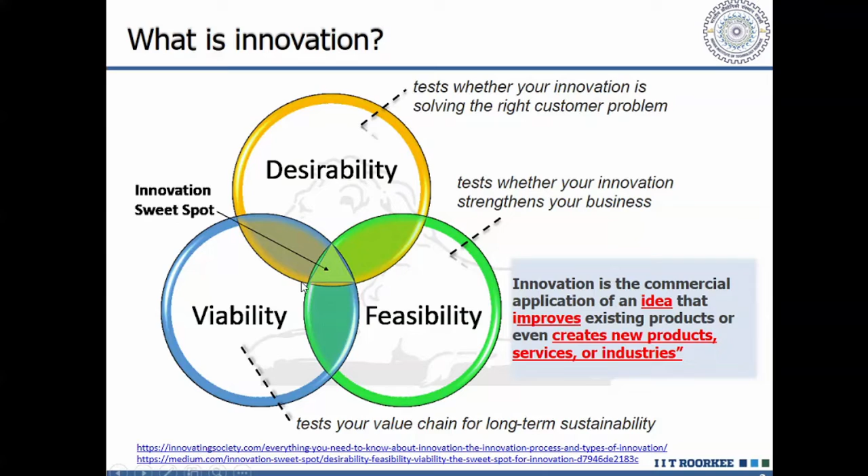Right from the materials, using certain transformation techniques or processes, it has been converted into the final product. So that process of converting raw materials to the final product—if we are improving it, if we are trying to come up with new developments in those processes—that will fall under the broad gambit of process innovation. It will lead to a better price for the customer.

The assembly line reduced the production time of a car, and we have seen the benefits can be multifold. It can be reduction of price for the customer, reduction in time, reduction in labor, and reduction in materials used. In this example, the assembly line reduced the production time of a car from 12 hours to only 2.5 hours.

Similarly, the second process innovation example is Google's 20% project. This project allows Google employees to work on personal projects for 20% of their working time, and this process innovation led to the development of Gmail that all of us use these days.

So we have seen the basic idea about product innovation and process innovation. During this complete faculty development program, there will be different speakers. Someone may focus their talk on product innovation, some others may focus on process innovation. So I am trying to set up a tone so that you understand the terms being used during the next lectures.

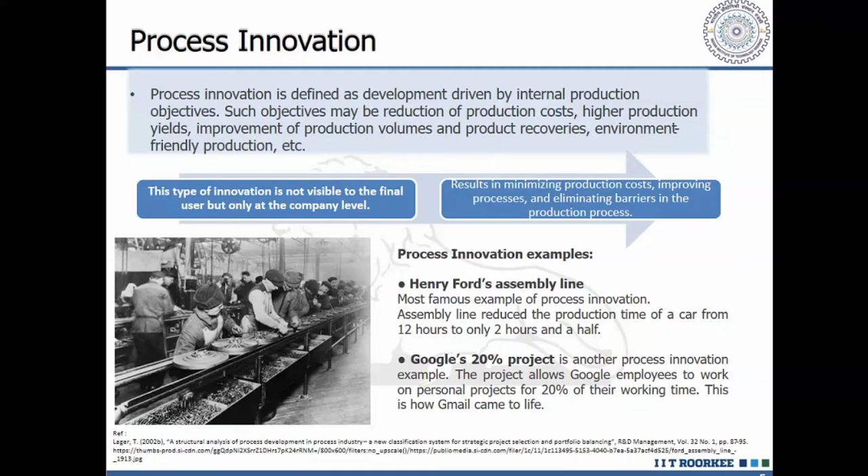So we have the potential, we have that talent pool, we have the age dividend and demographic dividend, as Professor Vanita was addressing in the morning. We have a lot of young generation, and creativity is highest when you are young. So our young generation has the potential to become innovators, to become entrepreneurs.

So we are slowly and steadily improving our rankings in the Global Innovation Index, and we have entered the top 50. India ranks 48 in the Global Innovation Index, which certainly is not where we belong. We can certainly jump further and come into the top 10 innovative countries in the world.

This depends upon our talent pool of young creative minds that we have in the country. The only thing we need to focus on is design thinking about the products, the needs, the whys and the hows of each and every product that we use.

Now, how that can be achieved from a system point of view, we are organizing this faculty development program, and we got around 130 applications from various faculty members across the country. These participants are part of our FDP family now for the next one week, and we will continue our discussions in this direction.

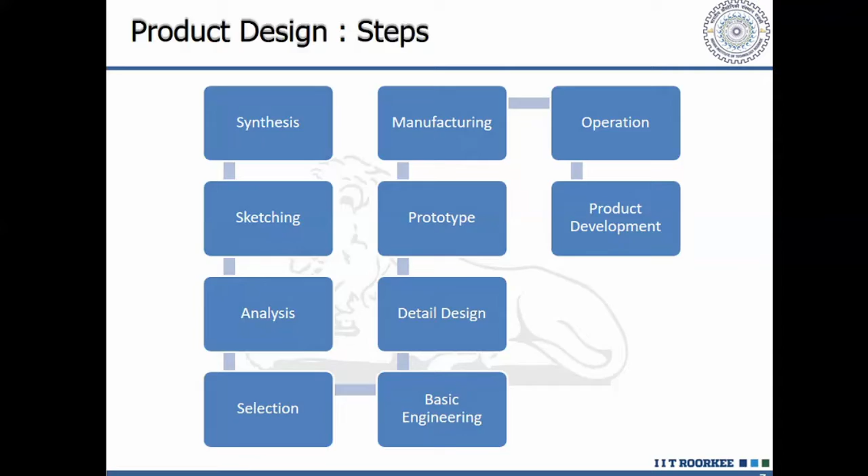But that is not so important, because those steps may vary from company to company. Research and development is an integral part of every positive thinking organization, so the research activity is continuous. Once you get tangible output from research, that output is converted into a product. But the analysis part is very important when developing a product or going for product innovation.

Now let us see the marketing aspects of the product. We study the expected demand, both short-term and long-term. Secondly, we focus on the functions offered by the product, whether they are desirable and acceptable to customers. So we focus on the requirement. But these are not the only steps we go to market with.

We try to understand the demographics - who are going to be our customers, what are their tastes, what are their specific requirements. As we saw in the example Professor Vanita gave in the morning, the product was launched but was not that successful. What are the reasons? She pointed out the important reason of marketing.

That is the most important thing - to assess the pulse of the customer, what the customer actually wants. We have to see which segment of society this product is going to be used for, or who are going to be the majority of customers who will use this innovation. All that understanding is developed at the marketing stage.

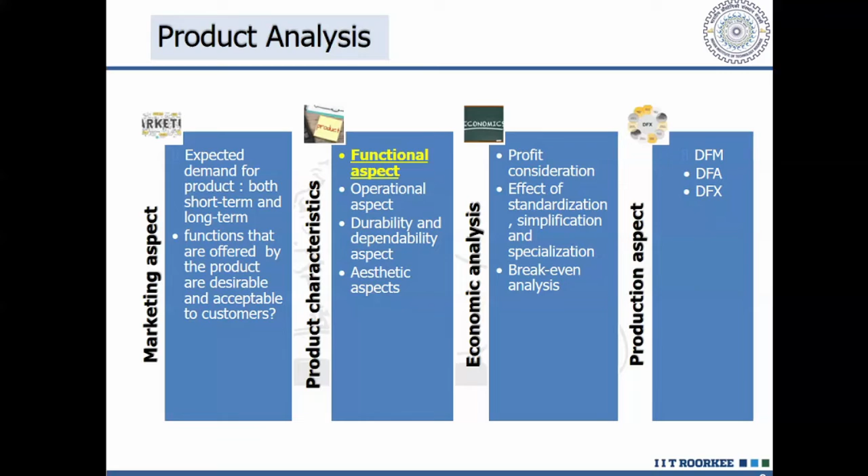Why do we need to study the functions of the product? To satisfy the user's need with a quality product. So the product must be of good quality at the lowest life cycle cost through applied creativity. So what we have to do is be very creative in our approach.

We have to ask questions like how, why this product, why this is being done in this manner only, why this can't be done in a better manner, or what can be the best way of doing this job, or what can be a better function which can be included in this product. So questioning will improve our creativity. The questions must be logical, not just for the sake of questioning.

You must focus on the problem with a clean slate. There is a term mentioned in Samuel Elian's book, called the attitude screen. So each one of us, when we are born, has a blank attitude screen, but with time, the screen keeps on filling up. We have some prejudices.

I like this vegetable, I don't like this vegetable. I like this taste of ice cream - I like butterscotch, somebody may like vanilla, somebody may like chocolate. The same is the case with the flavors of the cakes that we eat.

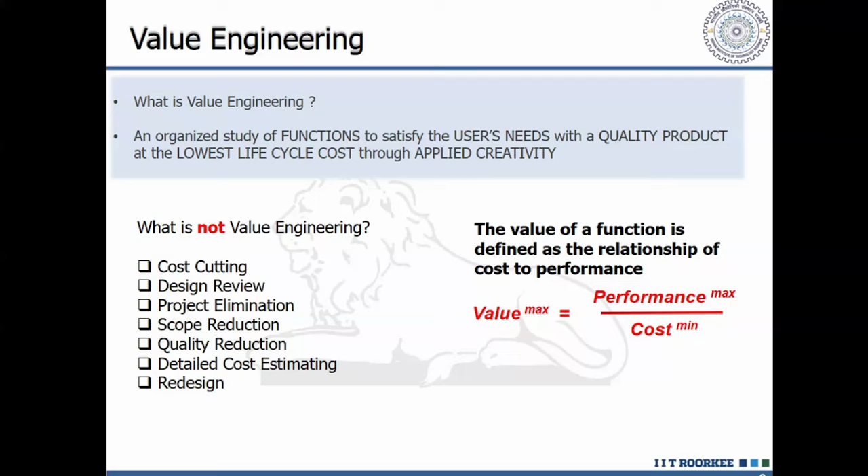Now, how will this help you? It will help you eliminate some of the unnecessary functions that are there in the product but are not being used by the customer or not delivering any value to the customer.

So how can we do this? We start asking questions - I told you creativity will come when you start challenging, asking why this way, why not that way. So here also we start asking how and why type questions and try to write down the functions of the product, then see which functions are not at all required and can be eliminated - by combining certain functions together.

We can also come up with new technology that has come up. For example, if you look at any fast diagram - one that is readily available on the internet - is a fast diagram for an overhead projector. I have not included it in my slides here, but one of the fast diagrams for the product is overhead... that we normally use. Just a minute.

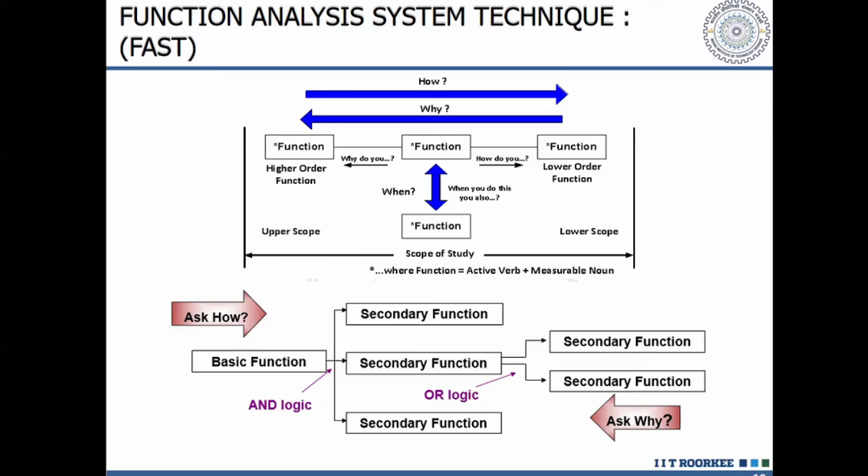I'm keeping an eye on the time, so I don't want to overspend it. Now I will quickly talk about design for X.

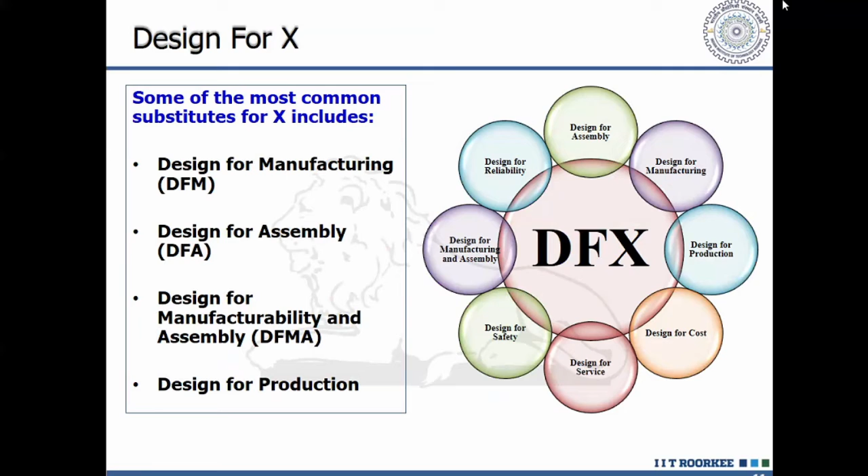This is also an important approach in product design: design for excellence. The X can take any value - we can have design for manufacturing, design for assembly, design for manufacturing and assembly, design for production. There are so many different X values: design for cost, design for service, design for safety, design for assembly, design for reliability, design for quality. We will be talking about design for manufacturing only.

When designing a product, suppose this is a part that has to be used. We have to see what the center distance of this hole should be from the edge. It is incorrect if it is less than T, the thickness of the sheet. This is just one guideline to show that when designing a product, we should focus on design for manufacturing aspects.

There's a standard guideline mentioned in the books that the center distance of this hole must be at least 1.5 to 2 times the thickness of the sheet we are using, where the sheet thickness is T. This is just one design guideline that must be followed when designing a product.

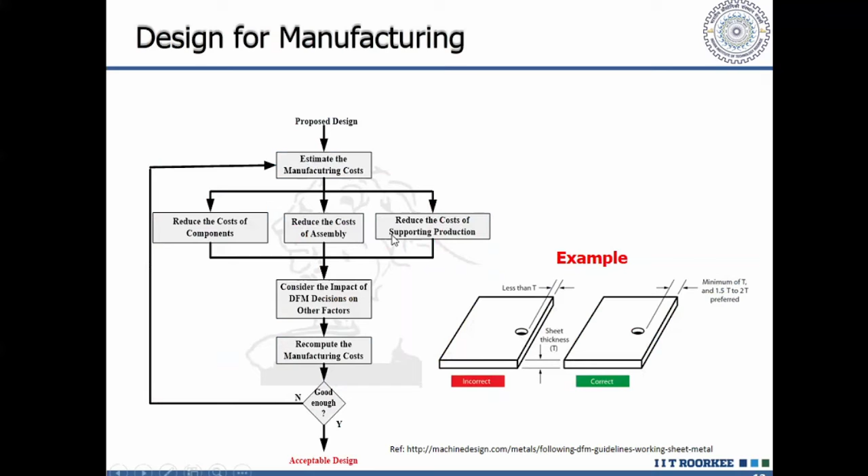There may be thousands of such guidelines available in textbooks, but the product designer must keep these guidelines in mind when designing the product. For now, I will skip this diagram because I wish to cover all the topics. Then there are guidelines for design for assembly, because most of the products you see - again I take the example of this laptop I'm using.

This has so many different parts which have been assembled together, so the designers must have kept in mind all these guidelines that you see on your screen. We try to minimize the part count and design the parts with self-locating features.

Many times you have to insert a SIM inside the mobile phone, so there is a slot which is exactly of the same size, and sometimes self-locking features are also included. So you will design the parts with self-locating features, self-fastening features, and minimize the reorientation of parts during assembly.

If you are doing the assembly, you should design your product such that there is a base part, and on top of that you assemble the other smaller or child parts. Design the parts for retrieval, handling and insertion. Emphasize top down, meaning again the same philosophy: a bigger part, on top of which you keep assembling the smaller parts.

Standardize the parts - it was one of the considerations in the economic analysis of the product also. The standardized parts will lead to very cost-effective design. Try to minimize the use of fasteners and encourage modular design.

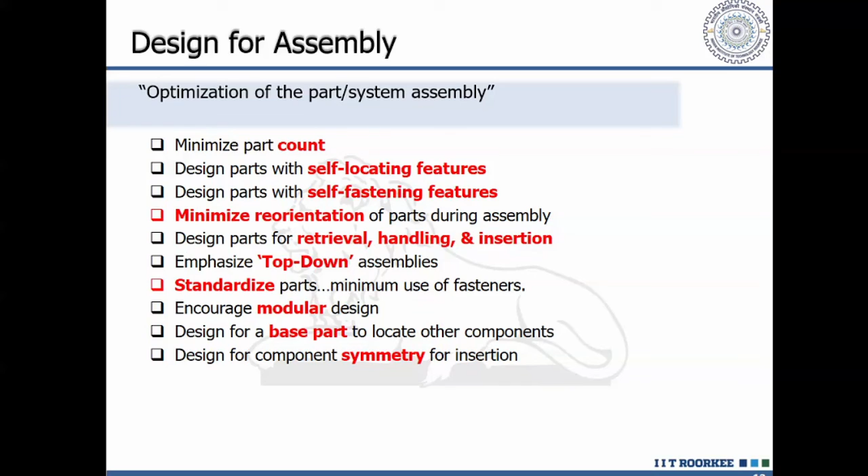There are other guidelines also. I'm just trying to introduce some of the concepts which a product designer must keep in mind when trying to come up with a new product development, so that we are trying to optimize the part or the system assembly.

This slide I will skip for the time being because I want to share some examples and the time is also going to be over. I am sorry for the quality of the images because these have been taken from the book. The source of the book is given here - I think it is better to know about the source because you can read this book.

All these examples are taken from this book by Boothroyd, Dewhurst and Knight, which is on product design for manufacture and assembly. You can look at this book in your libraries or on the internet - it will be available, and you can buy the book online. This book gives so many different examples which must be kept in mind by a product designer.

Now here I will read it for you: minimize the part count by incorporating multiple functions into single parts. Therefore, I introduced the concept of functional analysis, because we have to see what are the redundant functions which we or the customer don't want in the product. So we should try to reduce those parts by incorporating multiple functions into a single part, which means we must try to combine the various functions.

Now here you see we are trying to develop or manufacture this cup in 3 different parts. So from the design for assembly point of view, we have to try to make it in a single shot so that all the assembly operations can be minimized. That is one good example.

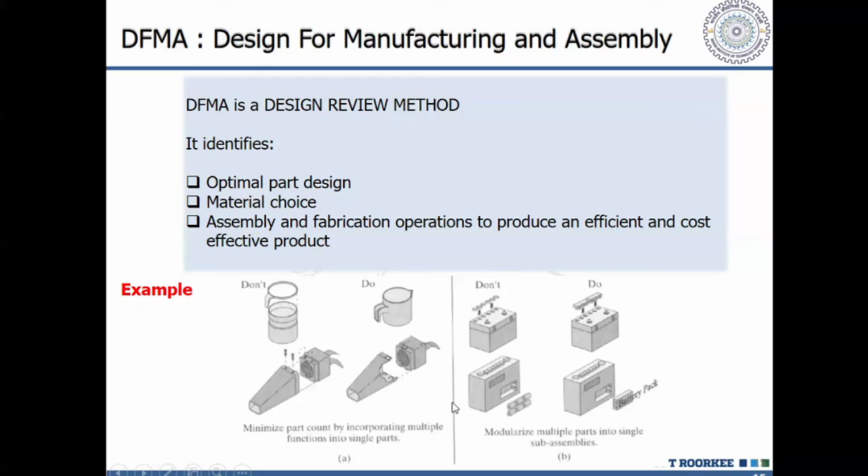Here we see: design the mating features for easy insertion. These type of insertions are difficult, so we can have simple insertion instead. This is a good design practice.

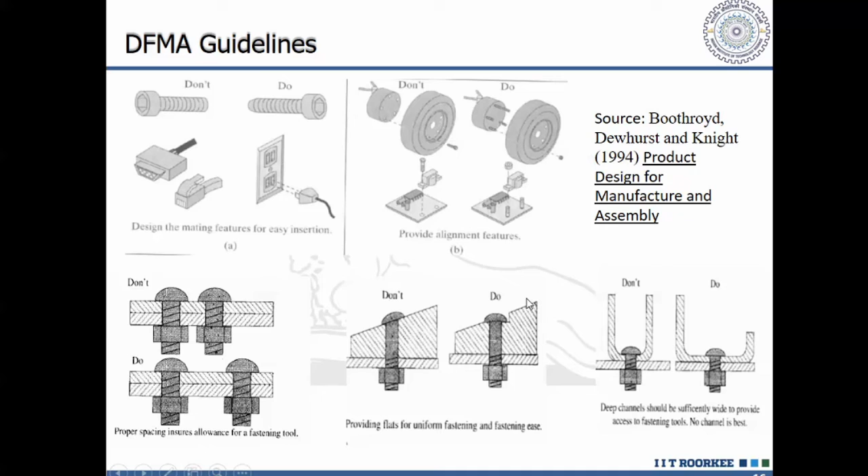So there are 2 pins here which can directly go here. So all these complex geometries sometimes you will find are difficult to assemble. There can be multiple such examples given in this book, which you can read to get an idea about good design practices for any product designer. I'm skipping this in the interest of time.

Now we come to the relationship between materials and process, because every product will have a process, as we have seen here. You may require holes, you may require assembly operations. If we go back, this is one part which has to be used in a product. It requires hole making operation, it requires machining, it may require casting.

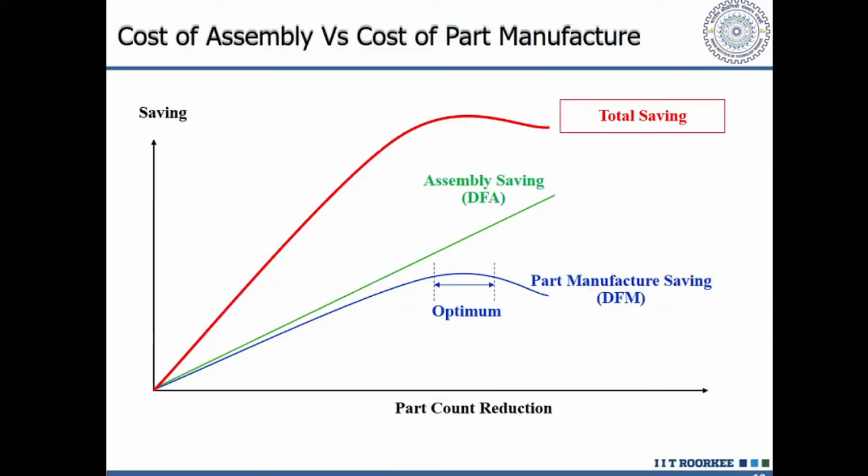As an engineer, a trained mechanical engineer, I was not even knowing that such type of information is available, before I started teaching a course on product design. Thereafter I came to know that this type of consolidated information is available for product designers.

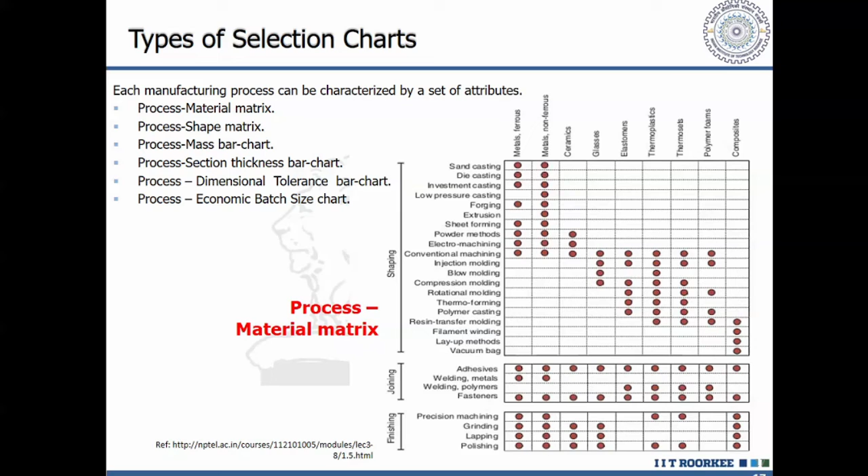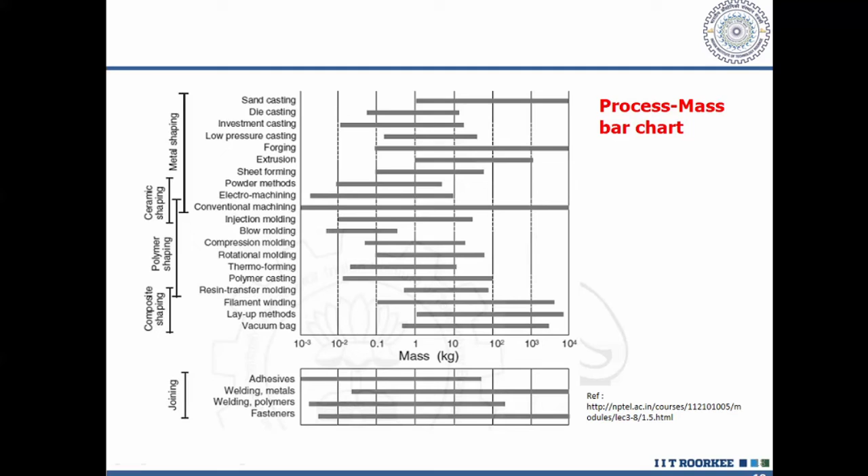Now this is the last topic I wish to discuss today, that is design for environment, which is very important, because in innovation, sustainability is an important keyword shown in the very first slide. Design for environment is equally important. Now what is design for environment? I will be skipping some of the slides after this.

Design for environment is a method to minimize or eliminate the environmental impacts of a product over its life cycle. The product will be used for 10 or 15 years, so we have to see that during its life cycle, and after the product has lived its life, meaning it has been broken down or has to be disposed of, or has stopped working, what is going to happen to that product and how is it going to affect the environment. That is an important aspect every product designer must keep in mind.

And this has been included recently as one of the chapters in this book, as you can see, Product Design and Development by Karl Ulrich and Steven Eppinger. The source is given here. An important topic, especially when we are talking about the environment. And just a few weeks back, we celebrated World Environment Day.

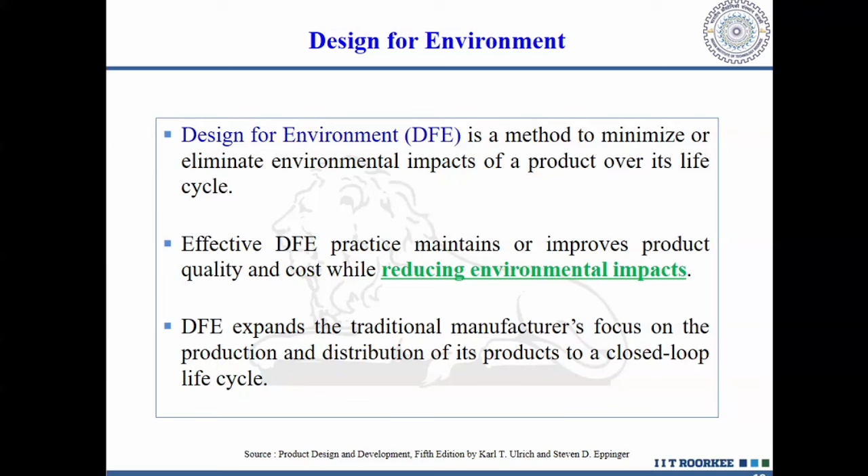As product designers, our focus must be on design for environment as well. There are a few slides for which I have given a reference. You can go through this book, Product Design and Development by Karl Ulrich and Steven Eppinger. It explains beautifully how and what should be our focus.

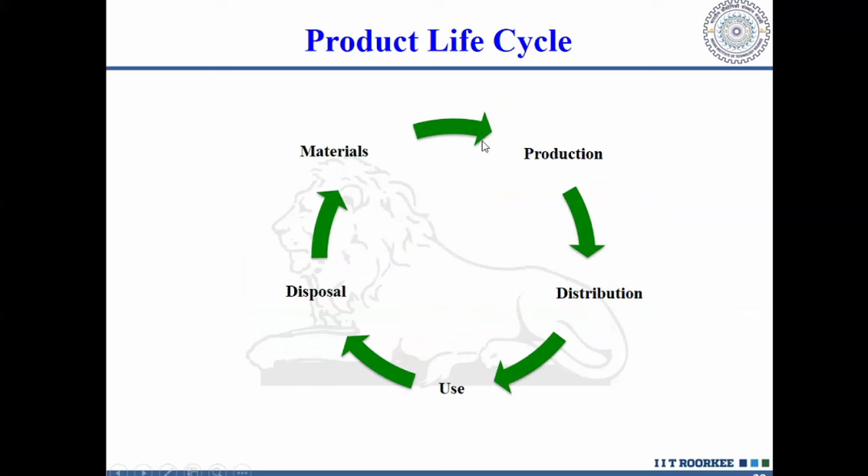These are the 5 important stages in any product. We get materials, we produce those materials into products. Products are distributed through the supply chains. Customers use the product, and then finally they have to be disposed of. The green color is shown because from a sustainability point of view, all these steps must be environment friendly, or whatever decisions we take during these steps must have a positive impact on the environment rather than a detrimental impact.

In the industrial product life cycle, we generously take materials from the environment, that is the natural biocycle. Whenever I take this session, I use the example of a wooden chair. We take wood from our natural bio life cycle, we cut trees, we get wood, then we produce it, and carpenters make a chair. That chair is used by customers. Finally, after 5, 10, 15, or 20 years, whenever the lifespan of that chair is over, we can remanufacture it, use the wood again, or dispose it off.

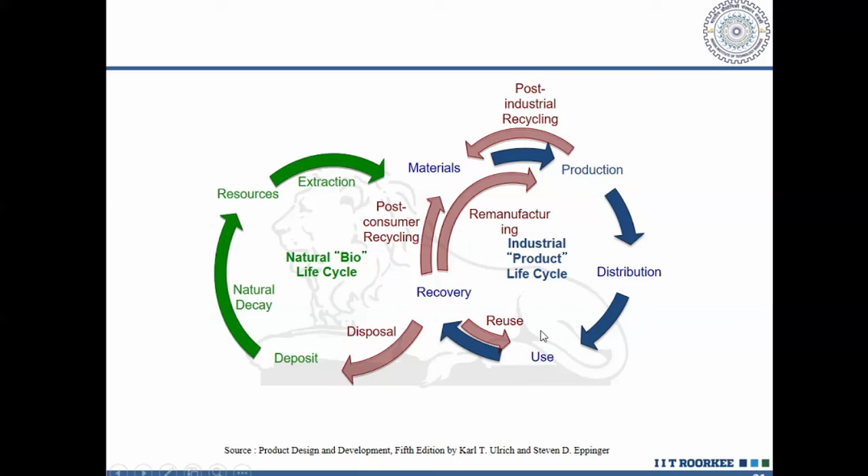So what we must try to do is turn these arrows which are blue into green, meaning whatever processes we use, whatever distribution channels we focus on, whatever method we use for that product, it must be environment friendly. That is the basic concept of environment friendliness.

So the summary of sustainability is that before disposing, whatever material we take from the natural biological life cycle must come from renewable resources, not from non-renewable resources. As well as whatever we dispose back into the environment must be organic, that is green, it must not be toxic and inorganic. So if we develop products using sustainable, green, environment-friendly materials, at the end of the product life it will be easier for us to dispose those materials back into the environment.

Otherwise, what is going to happen? They are going to create toxins or inorganics into the environment, which may affect all of us in a detrimental manner, or in a bad way. So that is a basic aspect.

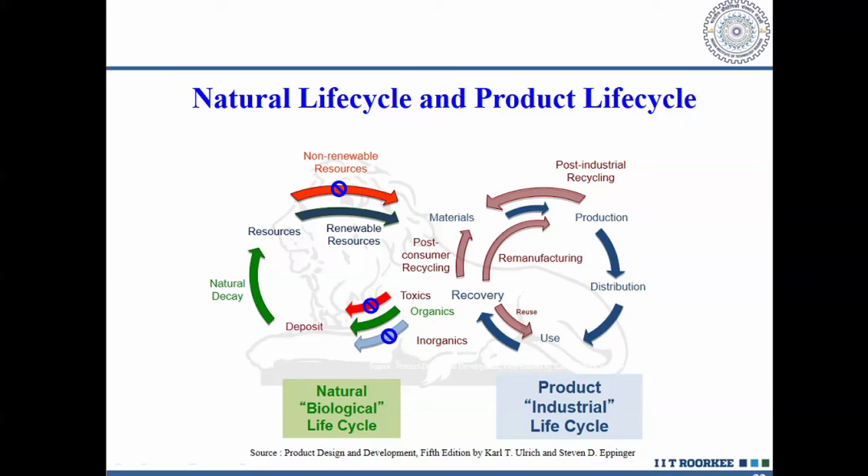Now, what are the conditions for sustainability? Eliminate the use of non-renewable natural resources. Eliminate the disposal of synthetic and inorganic materials that do not decay quickly. If I ask a question, name any 2 materials, I think everyone will be able to answer. And eliminate the creation of toxic waste through your products or your processes that are not part of the natural life cycle.

So as a product designer, or as a learner of the course of product design, we must also learn about this important topic of design for environment. Now quickly I will show some of the products.

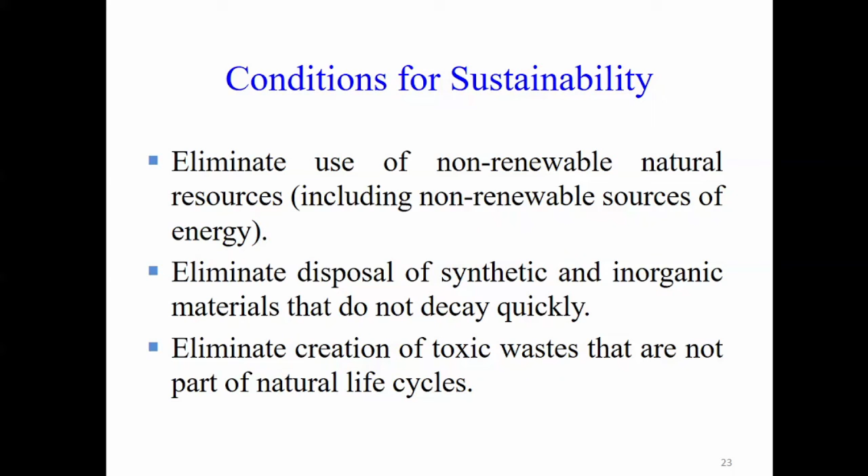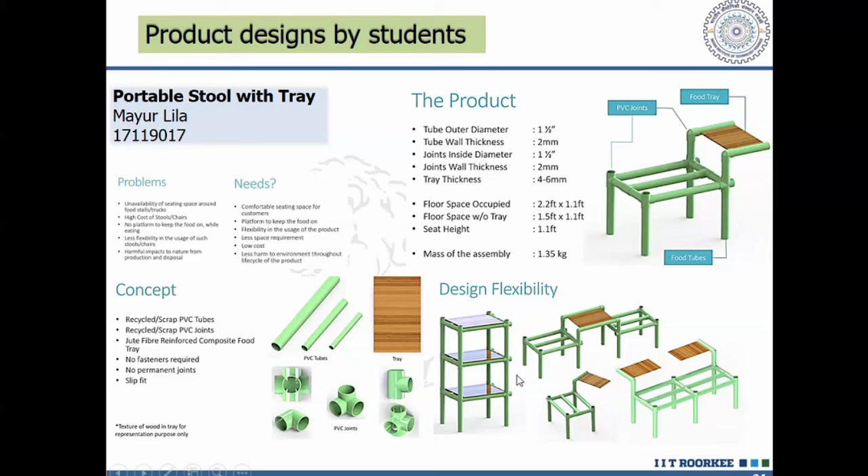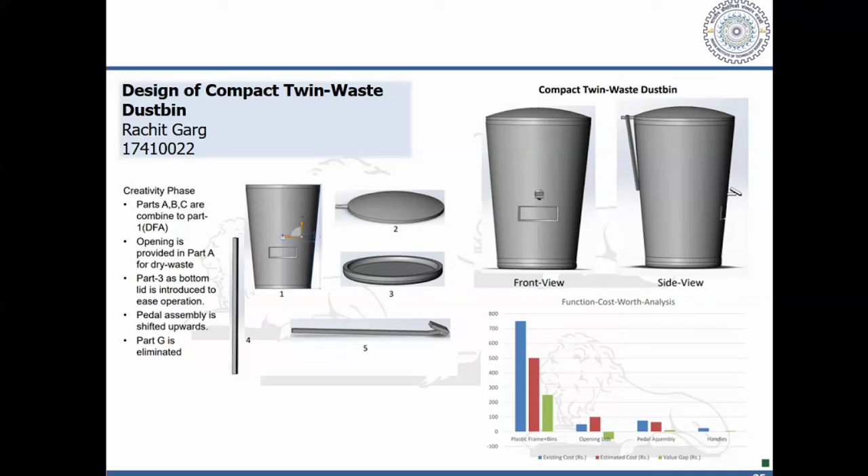This was a design of a compact twin waste dustbin, designed by student Rachit Garg. You can see here he was able to design this specifically for kitchens which are smaller in size, where you cannot keep 2-3 different dustbins for dry waste and wet waste. So it is a single dustbin which can accommodate both the dry and the wet waste.

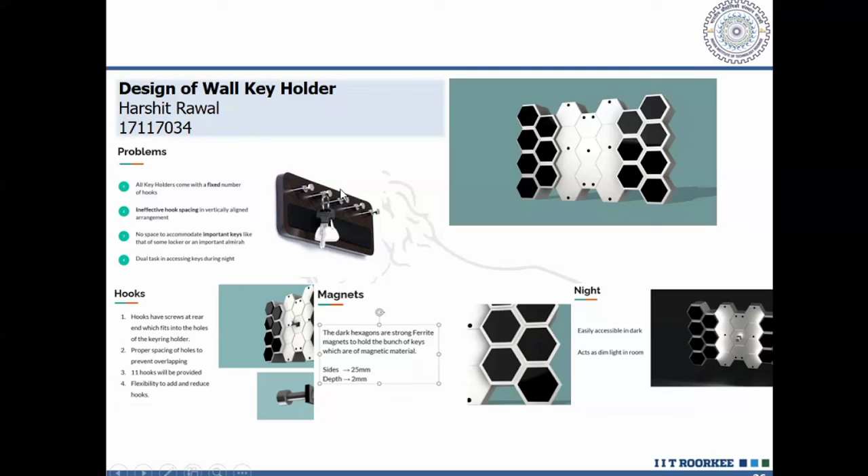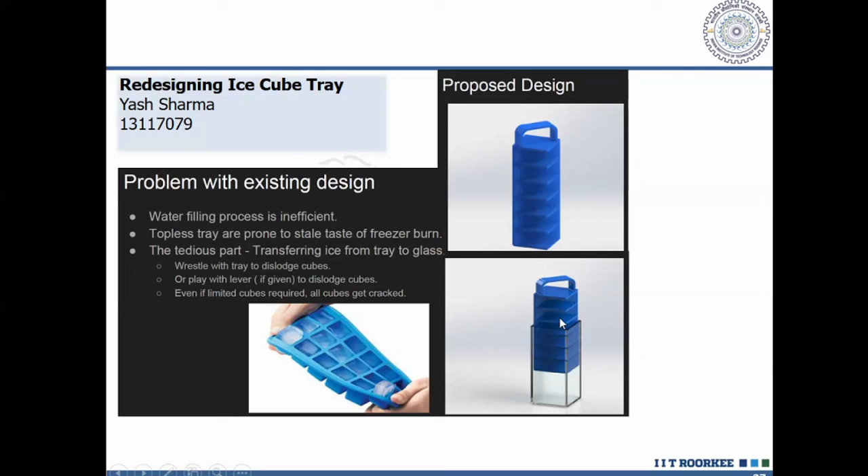This was a design of a wall holder by another student, Harshit Rawal, which has magnets as well as a place where keys can be hanged. This is a redesigned ice cube tray. The water filling process is inefficient. Topless trays are prone to stale taste or freezer burn, so there are problems. So this is a new design for the ice cube tray, proposed by one of the students in the class.

So I think, what is the time? I have overshot by 5 minutes, so I will stop speaking here.

As far as my own estimation of this session, I have been able to introduce the basic concept of product design, product innovation, process innovation, basic definitions with examples. We have had an overview of product analysis and the various factors to consider. We have studied the basic concept of value engineering and FAST diagramming approach, the important aspects of design for manufacturing and design for assembly guidelines with simple examples, and finally design for environment.

But all these topics are subjects in themselves, and each could be taught separately. For example, design for manufacturing is a complete semester elective course we teach to our master's students. Value engineering is also an elective course for third year production and industrial engineering students at IIT Roorkee. So value engineering, design for sustainability, design for manufacturing, product design - all these are topics taught over a complete semester, but I have tried to summarize and give you a broad overview of the whole product design process.